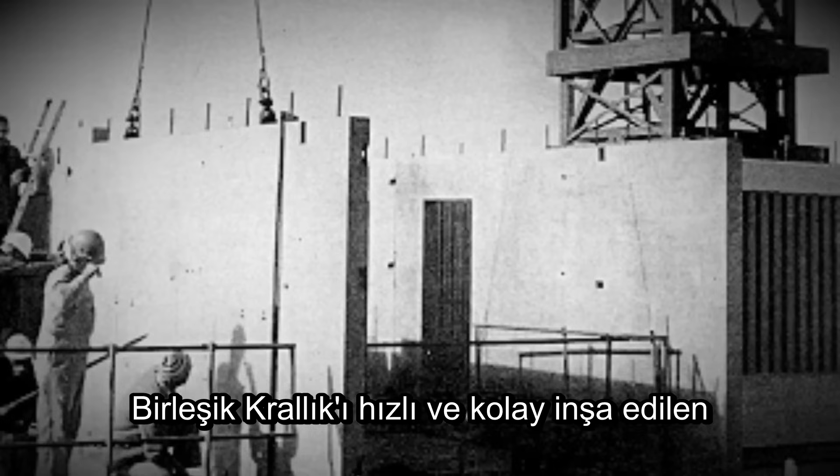Background. Our story begins nearly 50 years before Grenfell's death, with a need all too common, that is housing. A need that would drive the UK to source quickly and easily built residential buildings. None more requiring social housing, arguably, than the nation's capital. One such development was the infamous Ronan Point, out towards the eastern end of London's vast metropolitan area. But another would be out in the west.

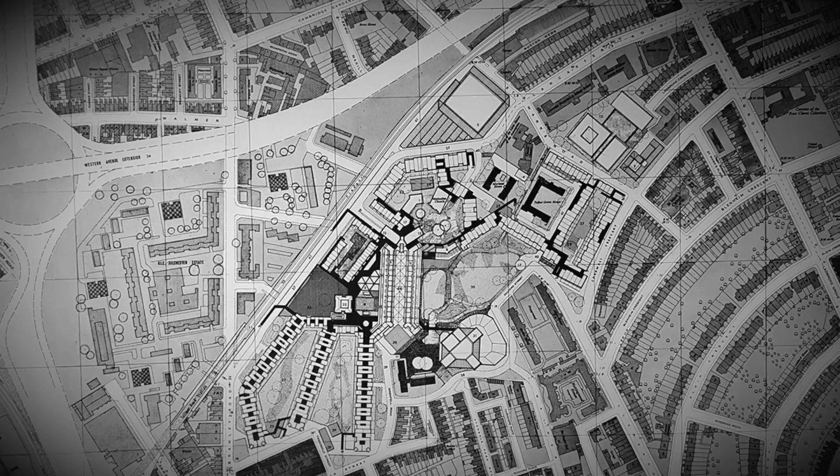This would be in the borough of Kensington and Chelsea, near Notting Hill to the east of Latimer Road tube station, which is around here on a map. In 1964, plans were proposed for redeveloping the slums of Notting Dale into a modern and brutalist social housing estate. These were all the rage in the 1960s, where London was still redeveloping after the destruction caused during the Second World War. The plan from architects Clifford Wearden and Peter Deakins was to build a housing estate, shopping piazza, and a new Latimer Road London Underground station.

To connect all the buildings, which would include a couple of tower blocks and a few smaller residential buildings, elevated walkways were planned. The original plans also looked to place decking over the roads for public spaces, thus hiding vehicle traffic from view. The newly reborn, in 1965, Royal Borough of Kensington and Chelsea did not show much interest in creating two-storey roads. I'm still trying to decide whether this was a good or bad concept.

Probably bad, as history has shown we aren't very good at maintaining concrete infrastructure, as anyone who has ever had to rely on the Hammersmith flyover would probably agree with. And thank the sat-nav gods, I have never needed to drive down there recently.

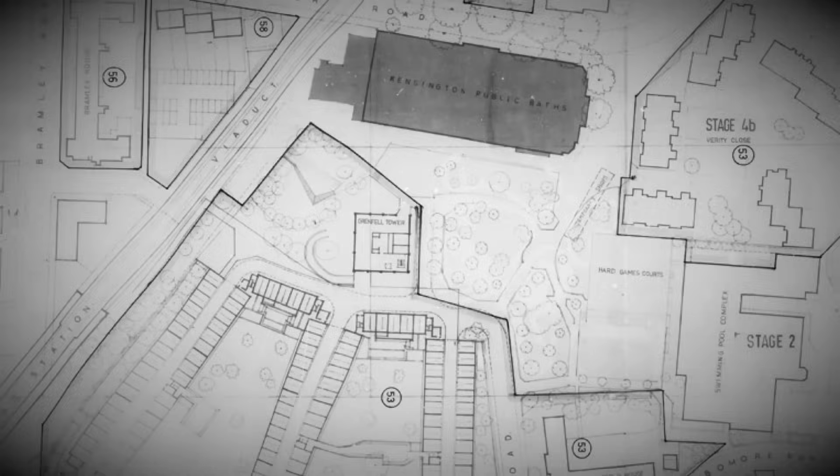Well, long story short, the new estate was to be less innovative after the council refused some of the more modernist concepts. But it didn't mean that it was a cookie-cutter estate. It did have some interesting features. Deakins had previously helped with the designs of the Barbican housing estate, as well as the Golden Lane estate, so by now he was a bit of a brutalist design veteran. The plans would end up being scaled back when London Transport saw no need of building a new station. But the main tower block was retained. It would be named after a field marshal, Mr. Grenfell.

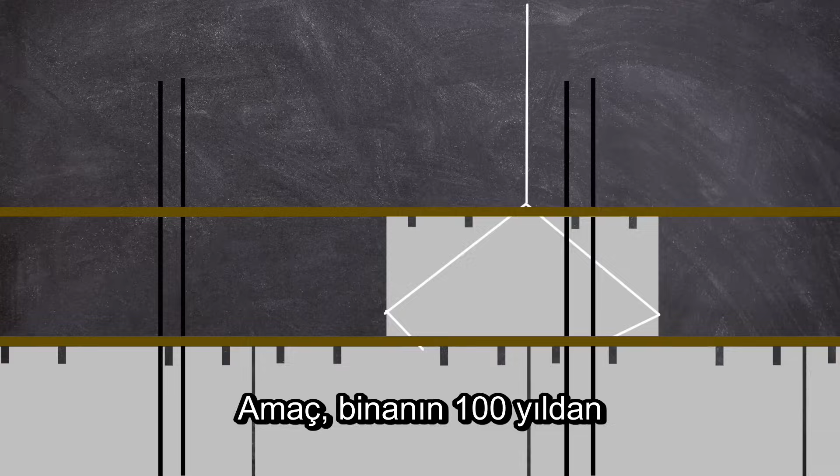The disaster of Ronan Point would directly influence design considerations for the main tower on the Lancaster West Estate, as it was known. As such, Grenfell would be built with an attention to strength. The idea was for the building to last well over 100 years. To achieve this, Grenfell had a central core containing the lift, a single staircase, and vertical sections for the services like water, telephone, and electricity. Coming out of the core were external perimeter columns.

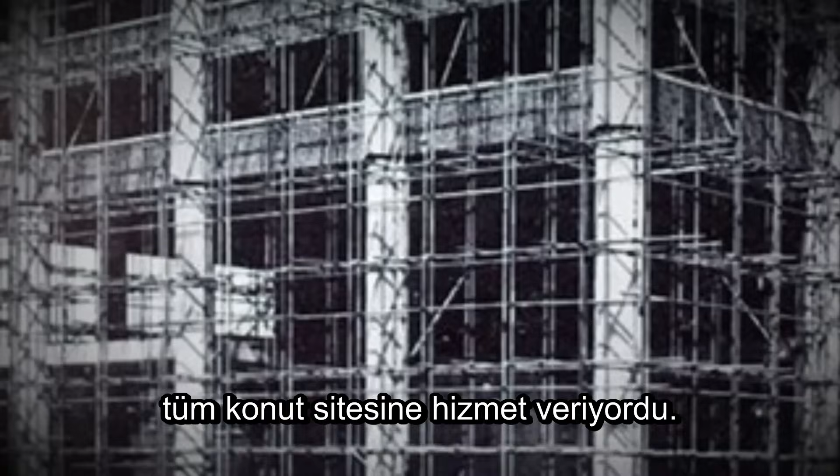A central boiler room was provided for hot water. This was situated in the basement and fed the whole housing development. Construction for Phase 1 would begin in 1970, with Grenfell seeing initial works beginning in 1972. The building would be 67.3 metres tall, or 221 feet tall, and originally contained 120 one- and two-bedroom flats. 20 of the 24 storeys would be used for residential, with the bottom 4 being used for non-residential purposes.

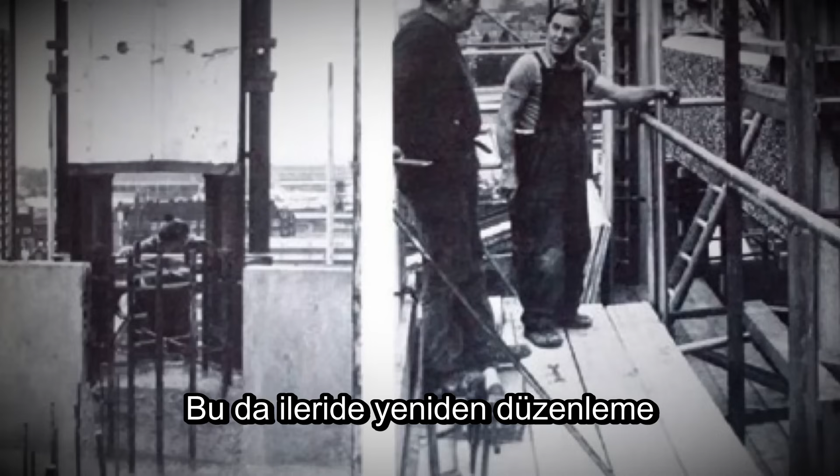To help with the flexibility of accommodation, all internal partition walls were not structural. This could allow for reconfiguration later on, something pretty handy for a local authority. Because of its flexibility, it was slightly unusual from other tower blocks of a similar vintage, and this was because it allowed the flats per floor to be 6 instead of the more common 4. The floors contained a 2-bedroom flat at each corner, which was the standard arrangement for the time, but in between on the east and west face was a smaller 1-bedroom flat.

Externally, the building comprised horizontal structural concrete spandrel panels, sliding aluminium framed windows, and non-structural white window infill panels. The tower was completed in 1974, and soon after opening its doors, the council started welcoming families to their new homes.

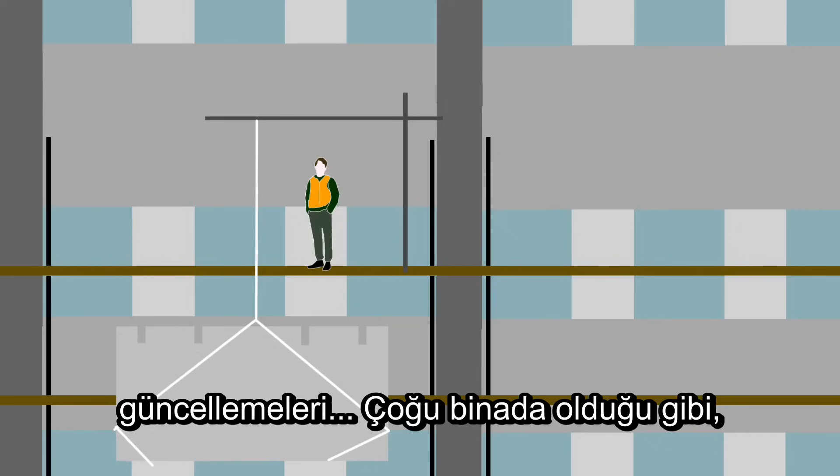Grenfell underwent a number of refurbishments and modifications throughout its life. In 1985, the front doors to the flats were replaced with self-closing, fire-resistant types. In the 1990s, in an effort to combat rising crime, a key fob system was installed, meaning in theory only residents could access the building. Between 2011 and 2013, the fire doors were again replaced with more modern, compliant ones.

Talking about fire, we need to discuss the design theory, and thus fire safety theory, prevalent in the UK when Grenfell was built. There was a glaring issue with high-rise blocks, which Ronan Point highlighted, but it was known before, and that was fire.

If there's a fire, how can anyone get out safely? Well, how about if you don't need to get out at all? In theory, if the flat is fire resistant enough, occupants can sit it out until help arrives.

This was mentioned in the 1962 British Standard Code of Practice, number 3, chapter 4, Precautions Against Fire: the assumption should no longer be that buildings must be evacuated if a fire occurs, and high-rise residential buildings should therefore be designed so that occupants of a floor above a dwelling which is on fire may, if they choose, remain safely on their own floor. It may be necessary to evacuate the floor on which the fire occurs, and in some circumstances those floors in the immediate vicinity of the fire, but occupants of other floors should be free to reach safety via the staircase.

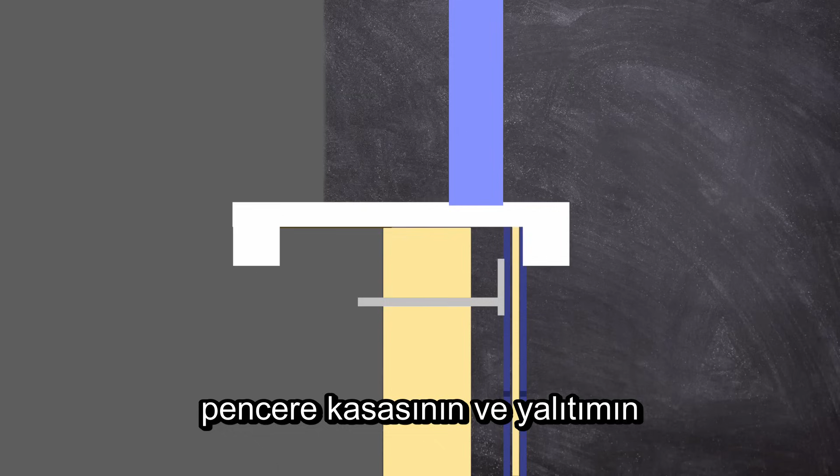The new windows would be mounted and glued to the PIR insulation. UPVC window jambs would be mounted over the original wooden window frame and the insulation, creating a wider window ledge as it covered the extra layers added to the concrete facade.

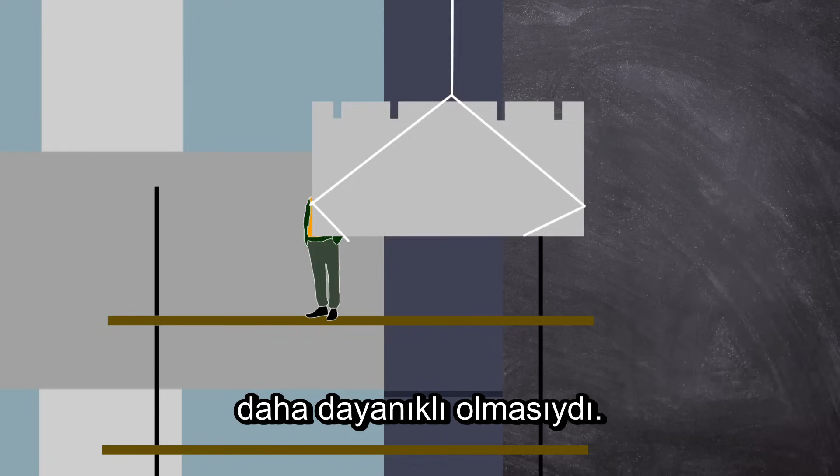This system was more cost effective compared to others available on the market. The trade-off was, however, that the more expensive options were more fire resistant. The materials used in the refurbishment would be a pretty hefty saving.

The Kensington and Chelsea TMO, the organisation formed to manage all of the Royal Borough of Kensington and Chelsea's housing, saved nearly £300,000 in total, a pretty big cost reduction on an £8.7 million refurbishment project. This, amongst other savings, was the reason for that contract to change in 2014.

Regardless, the refurbishment was signed off, and there it stood, tarted up to look pretty. A home for nearly 300 people. A home that should be safe, somewhere to put your stamp on. A place of comfort, family, entertainment, a space for memories, but occasional sadness. But not a death trap. Well, until it was.

The fire. It is the evening of the 13th of June 2017. A resident of flat 16 on the 4th floor is returning home. The time is 23:30 and Behailu Kebede goes to his living room. The two he is sharing flat 16 with are asleep. Kebede goes to sleep on a mattress in the living room.

Shortly after, he is woken up by probably one of your worst nightmares, a fire alarm. He found out that his Hotpoint fridge freezer in the kitchen was on fire. He goes to wake up the two other residents in flat 16. Soon after, at 54 minutes past 12, Kebede makes a phone call to 999. He banged on his neighbours' doors to alert them of the fire, and he began to evacuate the building.

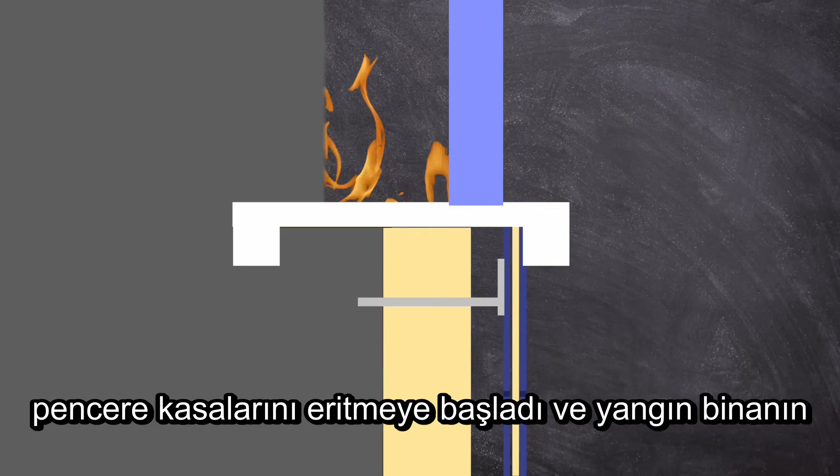There was no central alarm in the building, and many higher up were not aware of the fire below. The first firefighters entered flat 16 at 1:07. At 1:08, the flames started to melt the UPVC window frames and fire began licking up outside the tower. The flammable cladding caught alight. The cavity between the cladding and insulation acted as a chimney, sucking the flames up.

At 1:14 in the morning, the firefighters started tackling the blaze in flat 16's kitchen, but it was too late, and the flames had most definitely spread. Seeing the unfolding disaster, more engines and an aerial appliance were requested. Water jets from the ground couldn't reach higher than the 4th floor. Smoke had spread to above flat 16 into flat 26.

Some residents on the 5th and 6th floors started to evacuate. By 1:18 in the morning, 34 of 293 residents had escaped, and between 1:18 and 1:38, 110 had escaped. The flames spread up further behind the aluminium cladding. By 1:30 in the morning, the fire had spread at a shockingly fast rate and had reached Grenfell's roof.

By now, around 20 fire engines had been dispatched to Grenfell. Soon after, Met police officers arrived to create an exclusion zone, and London ambulances began to arrive to treat the walking wounded. The smoke had spread into the lobbies of several floors. Many were trapped inside their flats by the ever-increasing smoke and flames. The only staircase had filled up with smoke.

Between 1:30 and 1:58, only another 20 had managed to escape. The fire continued to spread sideways on the exterior, and by 1:42 had reached the northern side. Firefighters were given flat numbers of confirmed trapped residents. However, communication via radio had broken down.

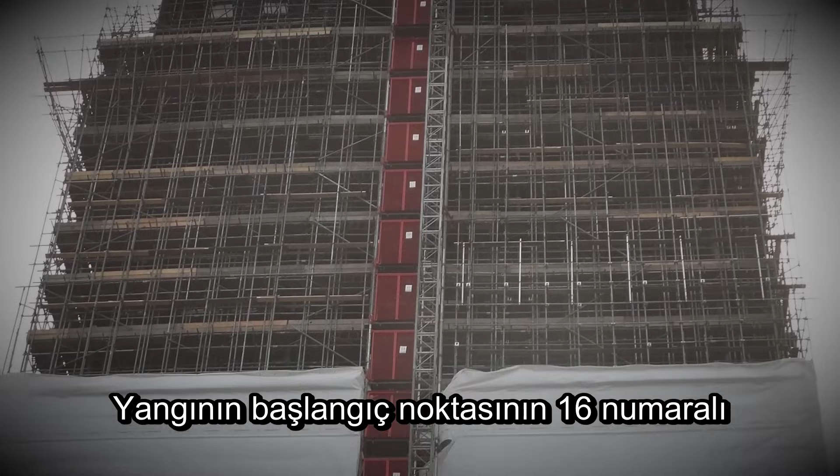It was pretty clear the start of the fire was the freezer in flat number 16. This melted away the UPVC window frames and jambs that covered the highly flammable insulation. Once this was exposed, fire was then able to spread into the cladding.

The investigation quickly found the cladding to be the cause of the rapid spread, but this was not very surprising to many. In 2014, the council were warned of their decision to use this type of cladding and insulation combination, and were advised to only use it in combination with non-flammable insulation.

It was also known as early as 2012 that Grenfell had some serious safety management issues. These included poor emergency lighting, improperly maintained firefighting equipment including out-of-date extinguishers, and other material going unchecked for years. These issues were just put aside and ignored, hoping they would disappear.

Some residents even formed a group called the Grenfell Action Group, and created a blog. In 2013 they published a health and safety report from 2012, raising concerns about the fire safety of the building. The group also pointed out the lack of appropriate escape routes, and that the hallways were allowed to fill with rubbish, blocking off the paths of escape that did exist.

In an ever-classy move, in 2013 the council threatened the bloggers with legal action, saying that their posts amounted to defamation and harassment. Even more tragically, two of the blog writers, Mariem Elgwahry and Nadia Choucair, would be amongst those who lost their lives in the fire.

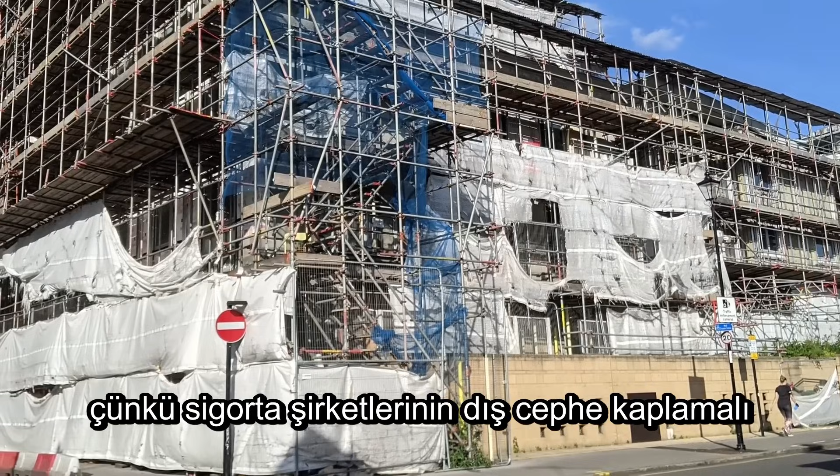The disaster shows the end result of negligence, penny pinching and underinvestment. The sum £300,000 saving would be eclipsed by the estimated £200 million to £1 billion in costs associated with the disaster. The disaster would also lead to the UK cladding scandal, which would financially ruin many, as overnight their apartments became worthless due to insurance companies refusing to cover externally clad buildings.

It also caused many residents to be rehomed or even just evicted, as some buildings became condemned. Now, there is a whole political, social and economic side to this disaster that I haven't even touched, but that's because I don't feel quite qualified enough to speak on it. But I do recommend reading the inquiry report and phase 2 when it's released, although you'll probably be saddened and even more likely angered.